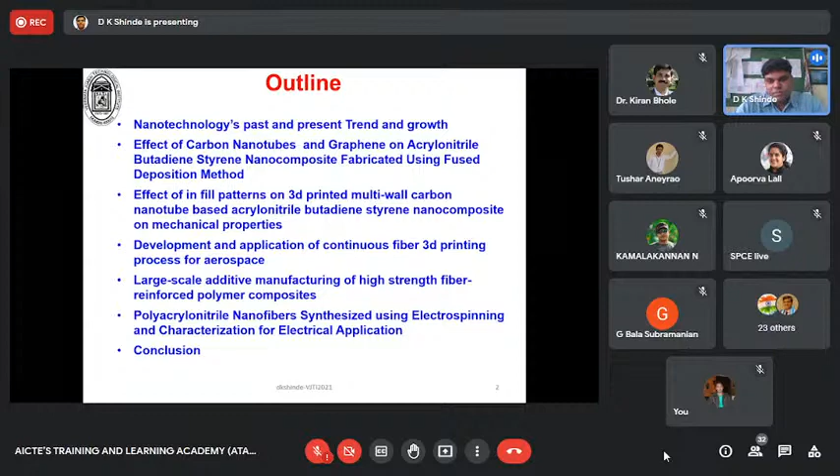And if I get more time, I can talk about electrospinning and a few of those applications we are developing, and how those fibers can be used to develop 3D printings. So I will emphasize on that part. This is what I have prepared for today, and I will go through that.

Everybody knows, I know all the participants are from different areas of the country, maybe from different states. So we are located in Mumbai, central part, close to Dadar. We, VJTI, were established in 1887. This is a very old institute in Mumbai, which also gave birth to many IITs. IIT Bombay was also established by VJTI faculties, and the director of IIT in the founding year was from VJTI. So this is a very old institute. Earlier it was called Victoria Jubilee Technological Institute. In 1999, it was converted to the name of the mother of Chhatrapati Shivaji Maharaj, Veer Mata Jijabai, and now the acronym remains the same, VJTI.

I did my PhD from North Carolina A&T State University, USA. This is the US map, and this is the eastern side. North Carolina is here, and we are located at the Greensboro campus of North Carolina. The school in which I did my PhD in nano engineering was the Joint School of Nanoscience and Nanoengineering at the Greensboro campus, shown over here.

VJTI has a few UG and PG programs. We stood at NIRF ranking of 82, and ARIIA ranking of fifth among Government Engineering Colleges in the 2020 ranking, and 82 in NIRF 2021, and many more activities going on from my institute side. I belong to the Department of Production Engineering, established in '59, and a few of the programs we run at our department are BTech, MTech, and PhD in the Department of Production Engineering, VJTI. That is from my side. I always give a small introduction of my department, my institute, what we are doing, and where we are coming from.

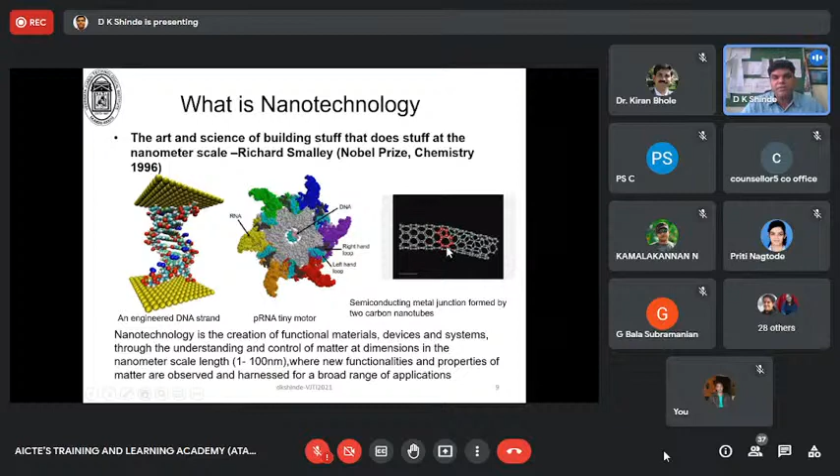A few examples: here is a molecular dynamics simulation in Material Studio. This is an engineered DNA strand, made by joining atoms to prepare a DNA strand with the help of molecular modeling at the nanoscale. Then you see the pRNA tiny motor, which has been created with DNA inside and RNA outside, with right-hand loops and left-hand loops, showing how you can prepare pRNA tiny motors with nano stuff at the nanoscale level. This one is a semiconducting metal junction formed by two carbon nanotubes connected together, modeling done at the initial level to see that.

So what is nano? Nano is nothing but 10 to the power minus 9, or one billionth of a meter. That much small size — we know micro sizes, micrometers, which we have seen under the microscope. But to do this work, we need some kind of scale specified for this technology. We take 1 to 100 nanometers, but we cannot see everything with the naked eye, so we need microscopic equipment called scanning electron microscope, transmission electron microscope, or atomic force microscopy — AFM, TEM, SEM — required to see and manipulate things at the atomic level.

And if you take that walk across a dollar bill, how long would it take to reach the other side? That's how you can think about these small scales. The person would take almost 24 years to walk across a 10 rupee note, or a $1 bill, when shrunk to 1 nanometer size. That's how the smaller the things, the more important scale plays a role.

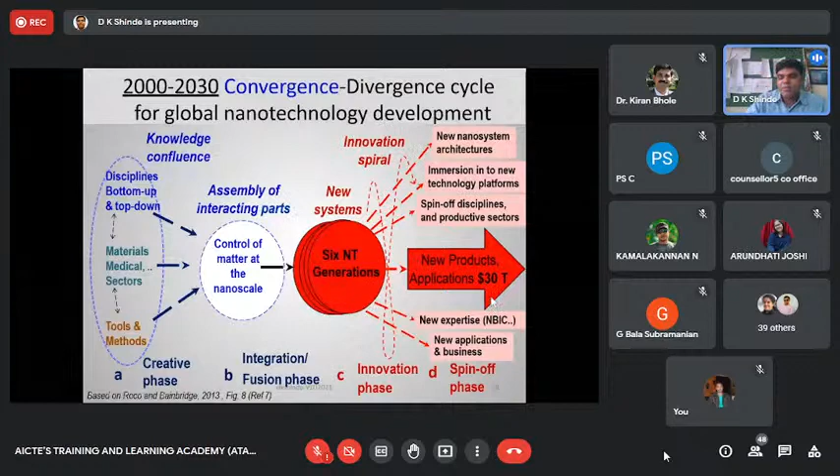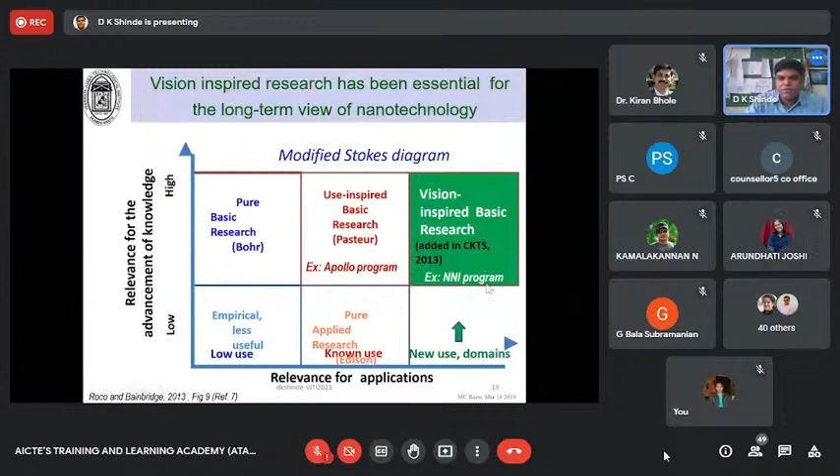So vision-inspired research is now changing from the conventional way to vision-inspired research by adding those nanotechnology initiatives. A few of those representations in the last 30-year development, if you look over here, it's changing the focus and priority to converging knowledge and technology for societal development.

Phenomena and devices are coming with nanophotonics, nano components, quantum fluctuation between selected materials, and material surfaces are becoming almost frictionless in magnetic computing. Also, million times less energy consumption is required.

How developed countries like the United States - a few of those presidents spend more budget on nanotechnology, from Clinton, Bush, Obama, Trump, and now the 2030s era. Biden is also giving a higher budget to nanotechnology innovation and initiatives to bring technology development and make the energy sustainable goal of the United Nations.

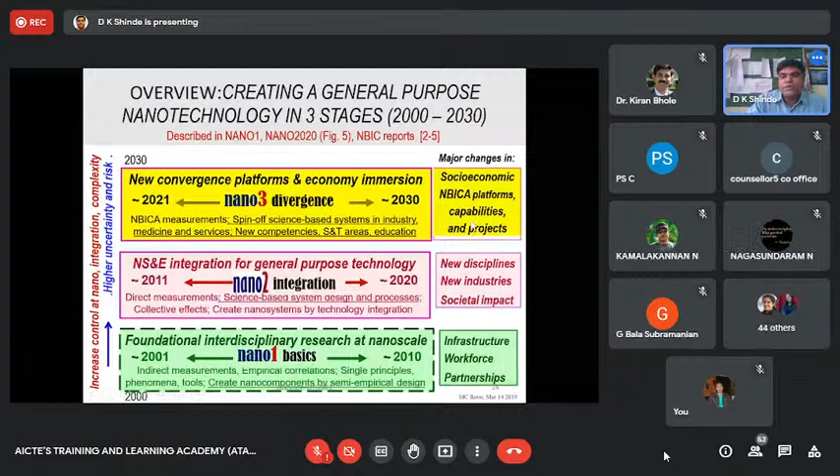Then nanosystems in health and environmental devices are coming. So these 2D and 3D many systems and devices have come in the form of biomimetics based, biorobotics, neuromorphic, or adiabatic switching for ITs and quantum systems.

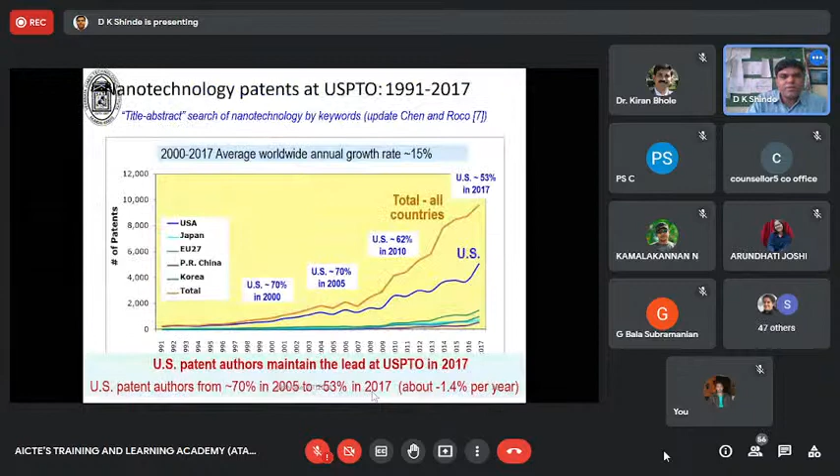A few of those countries are contributing to the research. So then, penetration of nanotechnologies, in terms of the percentage of patents -- basically many patents are coming, so you have a lot of scope to develop new material and file patents. That's what I want to encourage from this slide and a few slides which are coming.

So US, China, Europe, and Korea are majorly filing patents and getting more journals and patents, and that's how the material develops, and they are leading the technology world in the use of nanotechnology to make new systems and devices right now.

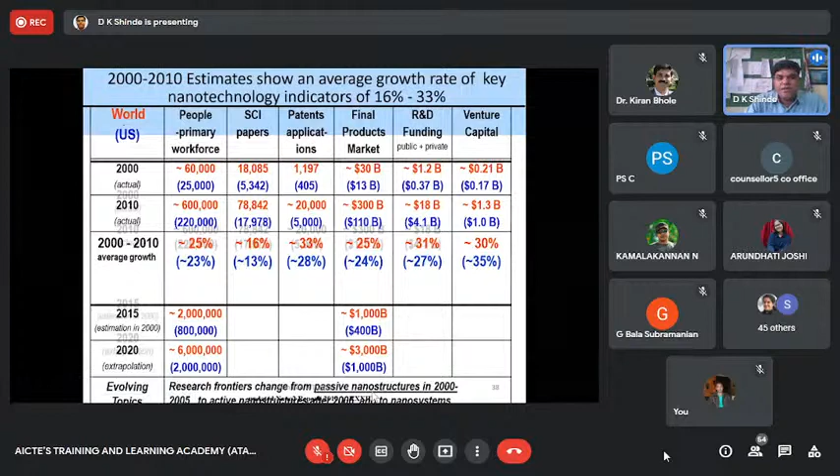So these slides show how patent applications are growing, and what's the product market has captured exponentially. The market growth is exponential and occurring.

So look at this one: in 2000 the market was only $30 billion. Now in 2020 it is $3 trillion, and it is still growing, and it can be bigger than that.

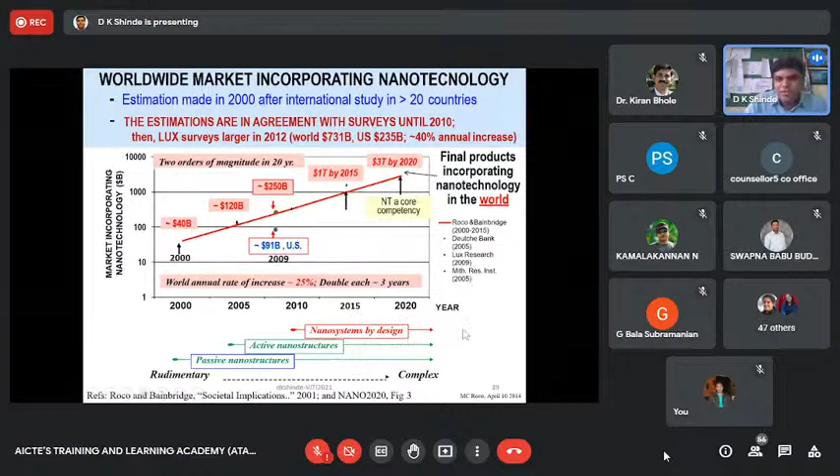So from passive nanostructures, active nanostructures, and the overlapping of those, nanosystems by design are coming, and people are investing a lot. So there is a lot of scope for new people who want to build their career in nanotechnology.

This is a little bit about what I have planned to help you understand more about nanotechnology and how it is going on. So let's start with the mechanical and electrical properties of carbon nanotube based material.

Acrylonitrile butadiene styrene, ABS material -- what we call a nanocomposite -- fabricated using fused deposition methods. This paper is already published in a Scopus publication of SAMPE in 2019. So we have a few things to share with you about the fused deposition modeling process.

You have understood from the presentations and talks from the past couple of days. The most recognized form of 3D printing of thermoplastic is commonly known as the extrusion method, and the same can be done with the help of fused deposition modeling, using extruders with a nozzle self-heated for the filament to melt, then deposit layer by layer and cure it, that is solidify, and deposit another layer.

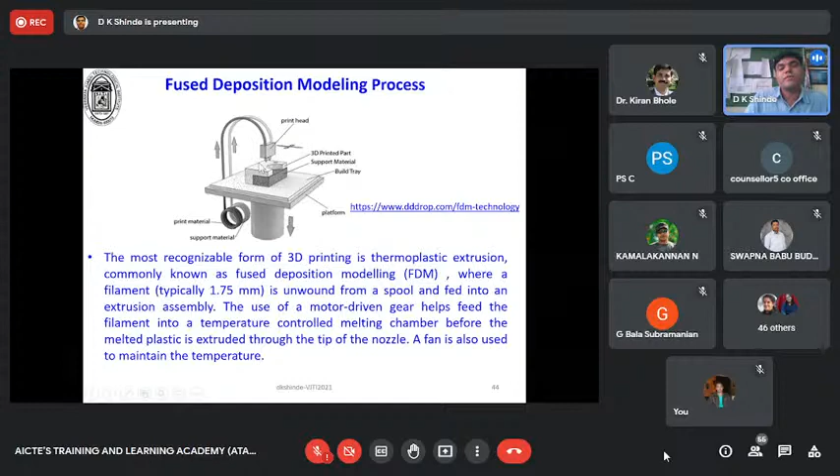So these are the spools which are unwound and pass through the nozzles, and you have the 3D printer head in which the heating arrangement is made, and there is a 1.75 millimeter hole in that nozzle through which the melted solution comes down, and you keep depositing.

Using the XY movement of your extruder is the best way to deposit. A few of these examples are captured from various internet sites and brought to one place to understand how things can be built using different materials. So first you develop the 3D model, then you do the slicing using the STL file, upload the STL file, set your material and check all parameters, and the entire 3D printing is completed by layer by layer deposition using fused deposition modeling.

So you have a lot of scope in the construction area. Automobile and aerospace people are working on reducing many components into fewer components in the assembly, so as to increase the reliability and efficiency of highly critical components in the aircraft. For example, take aircraft engines, generally GE may manufacture most of Boeing's aircraft engines, and they have converted nearly 1,000 components into like 200-300 component assemblies of the engine, joining sub-assemblies, so fewer parts means lower chances of component failure and higher efficiency. That's how 3D printing helps develop such components.

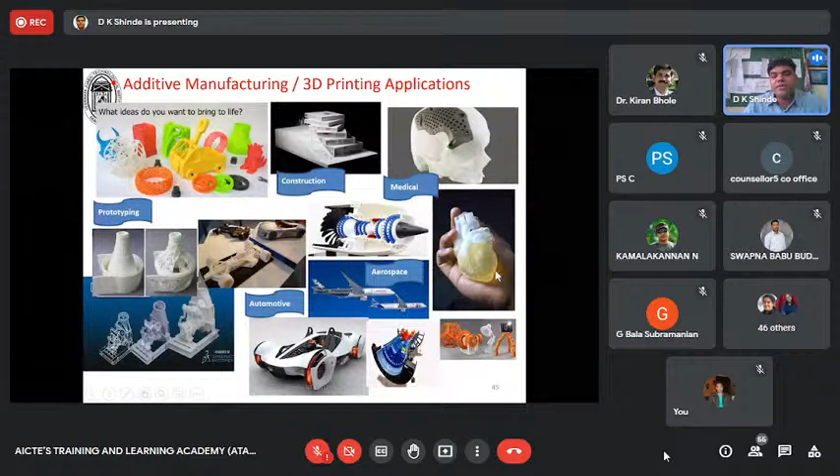So this is what we see, a few of these, our heart has been printed using this kind of polymer material, as shown over here. There are many others as well. So this is how it looks like.

So if you see over here, first you generate the CAD model. This is a frame with the XYZ coordinate system, G code and M code you give, and generate the code, and that code is fed to the processor, which controls the movement of the extruder in X, Y and Z direction over the substrate. So first and foremost is the CAD model, which you slice to get the STL file, and that STL file is fed to the computer, which deposits layer by layer, and finally we get the typical model we created in the CAD model.

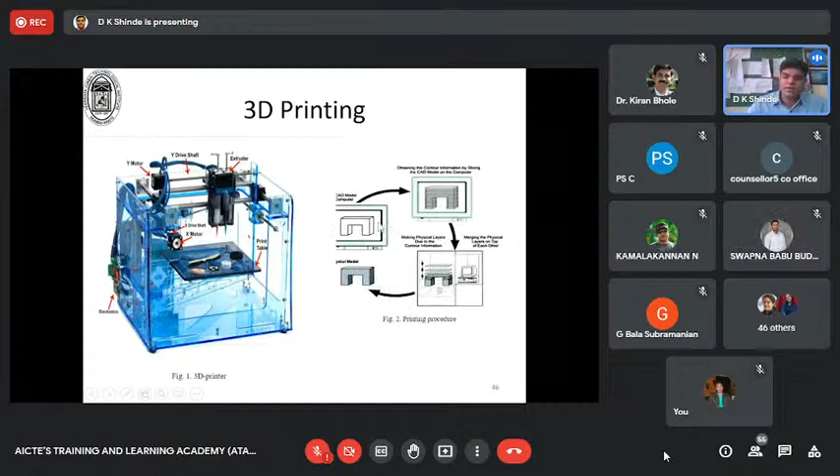So how does it exactly get deposited? You can see in this 3D pictorial view. This is a bottom platform which can move up and down, with layer by layer depositions shown clearly as layer 1, 2, 3, 4 like that. This is the shape, and this is how it comes, and once deposited, either to quickly cure we need to use a laser or maybe some UV light to cure it, and you can deposit another layer, and that's how you save time and material wastage very easily.

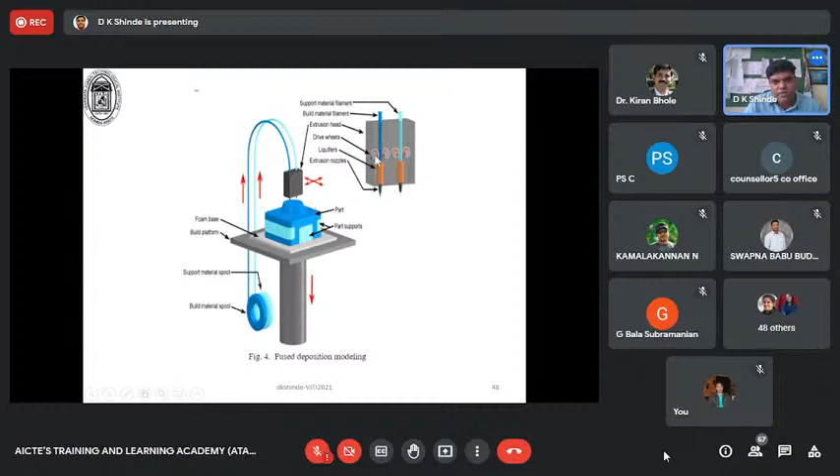The challenges are in self-cleaning, the clogging of nozzles is a main challenge, and people are now addressing this a lot, developing self-cleaning mechanisms that at a certain interval clean themselves and again start redepositing. So this is how the parts are built, but we still need to take care of continuous maintenance of the rollers, the heating zone, the coils of the extrusion, and nozzle cleaning.

So they have some mechanism attached with this one. They self clean, then feed it, and start depositing after a certain interval of time, and that's how a lot of time has been saved in the 3D printing.

So, a few of those laminate manufacturing methods. How to make laminate 3D printing laminates.

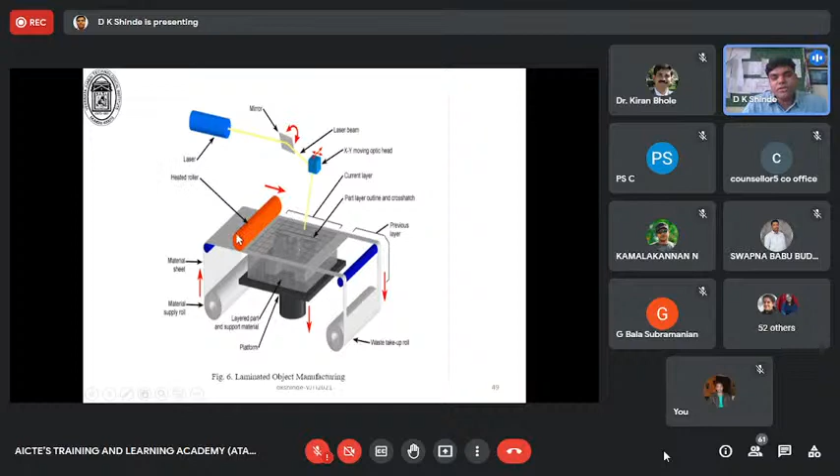So like that, you can have laminated object manufacturing also by using the 3D printing method. The material comes from here and the waste take-up roll will be on this particular side, and your part will be built. This is how we initially give the heat, but curing will be majorly done by this one.

So in our 3D printing manufacturing, we use the AccuSoft 3D printing system. This is a dual extruder 3D printer which we have in our laboratory to manufacture the ABS mixed with carbon nanotube, that's what I'm going to demonstrate.

Certain weight percentage of adding multi-walled carbon nanotubes has been shown from the literature to improve the properties of the material. But how do we customize such kind of spool is the major part of this research. So what we did, we customized it by adding a certain varying weight percentage of the multi-walled carbon nanotube to characterize the material and see what mechanical and electrical properties have been improved. That was the major goal.

So why did we choose ABS? ABS is widely used in automobile body parts, dashboards, wheel covers, and many other applications requiring cheap material, and easily you can develop such kind of material. The styrene acrylonitrile in the presence of polybutadiene, and that gives the shiny surface, and also has a rubbery substance and provides resilience at lower temperatures, and therefore this material has been widely used.

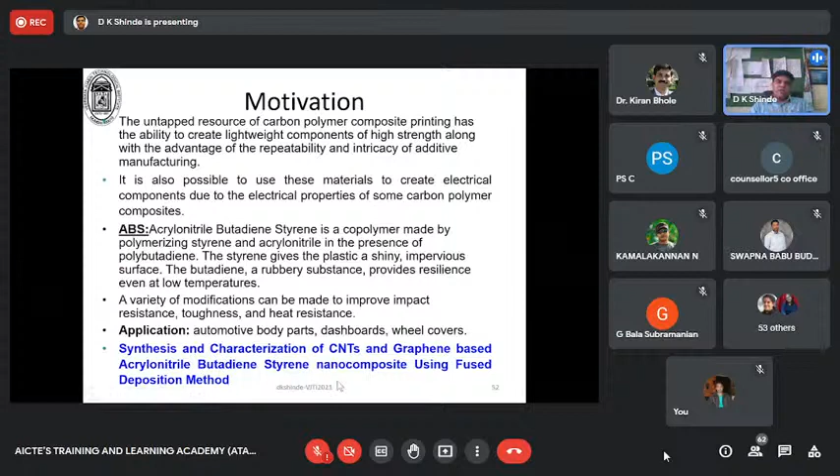But our goal is to improve the mechanical and electrical properties of the existing natural ABS material, and that's how the goal was to develop both the synthesis and characterization of CNT and graphene based acrylonitrile butadiene styrene nanocomposite using this one.

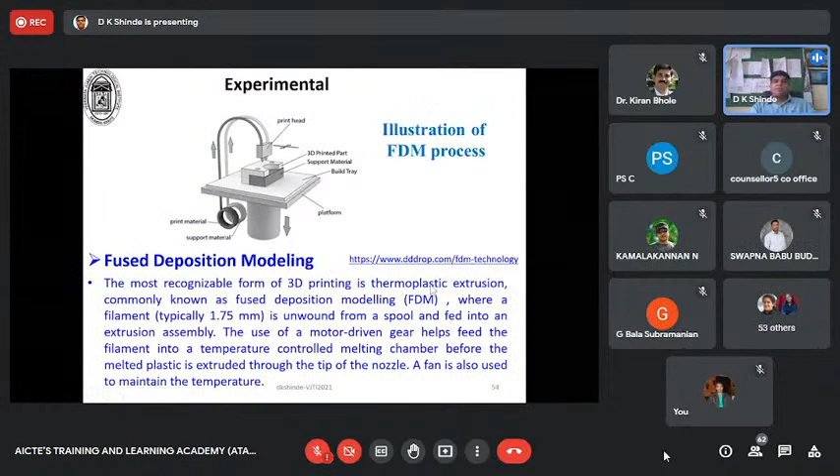So this is what people are using: carbon blacks or graphene oxide and other oxides, for many applications to develop new material. But in our research, we decided to use 3D printing of those materials using carbon nanotubes.

So we took three major weight percentages of multiwall carbon nanotubes. We bought it from suppliers from Faridabad as well as Jharkhand, and we did the characterization despite the characterization sheet given by the manufacturer synthesizing agencies from the source. Then we selected three weight percentages: 0.1, 0.2, and 0.3, to add into the natural ABS.

And prepare our spool. Customized spool was the first stage. So how did we do that? We have the pellets of ABS, and then we added three weight percentages: 0.1, 0.2, as shown over here, and 0.3 weight percentage of the total weight of the spool. Let's say the spool may be having like 2 kg, so we added that weight percentage, 0.1, 0.2, 0.3, and we prepared it.

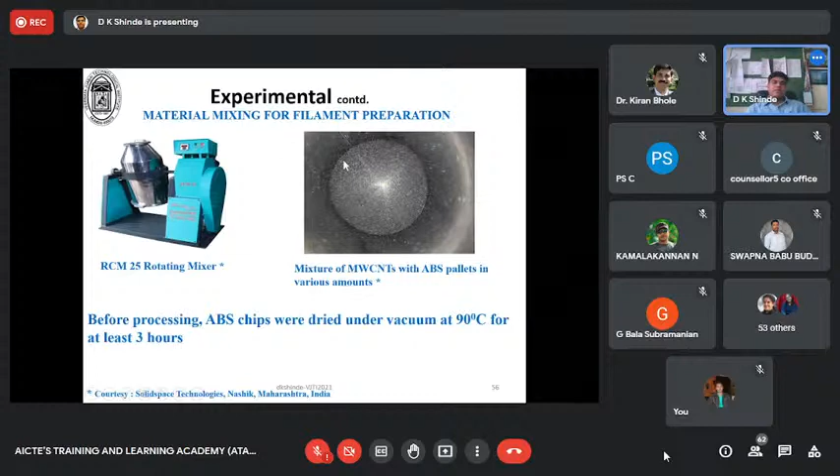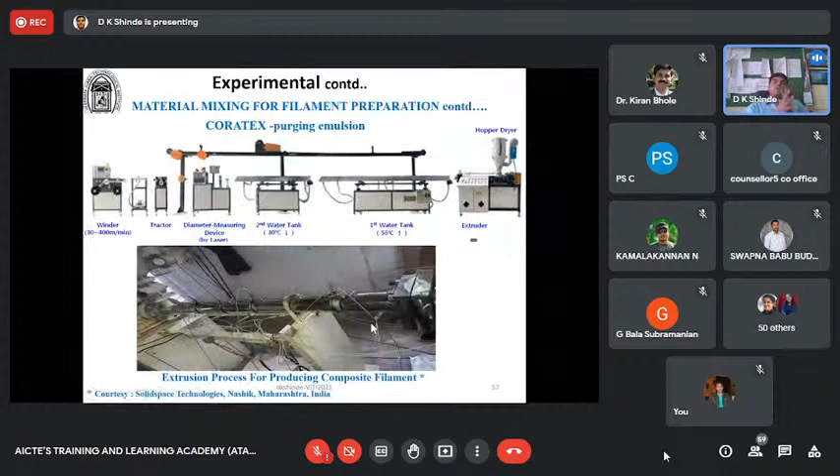Once that spool is made with 0.1, 0.2, and 0.3 weight percentage, then it will be taken to print the 3D printing parts. So directly what we did, we wanted to do the material characterization.

We followed ASTM D638 standards to print the specimen size directly rather than preparing a sheet and cutting it. So we directly 3D printed the dog bone shape coupons of natural ABS, 0.1 weight percent, 0.2, and 0.3 weight percentage of those spools.

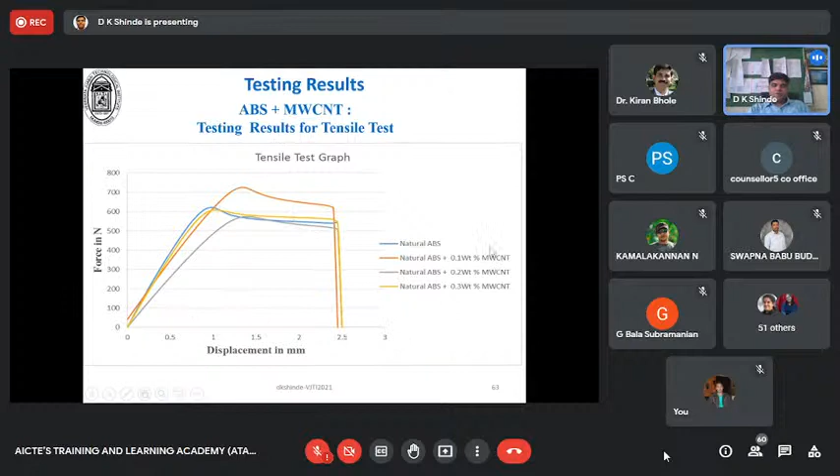Then we pulled those samples, and the tensile results are shown here. The natural ABS is blue, whereas 0.1 has shown the highest energy to fail the material, shown in orange. Up to 0.1 it has shown improvement in tensile strength, whereas adding 0.2 and 0.3 causes a drop in tensile strength of the specimen, which plays an important role in understanding that adding more doesn't support improvement in tensile strength.

If you compare this tensile strength, 21% has increased, and from the graph, roughly 12% has increased with 0.2 and 0.3. It starts decreasing very slightly after that.

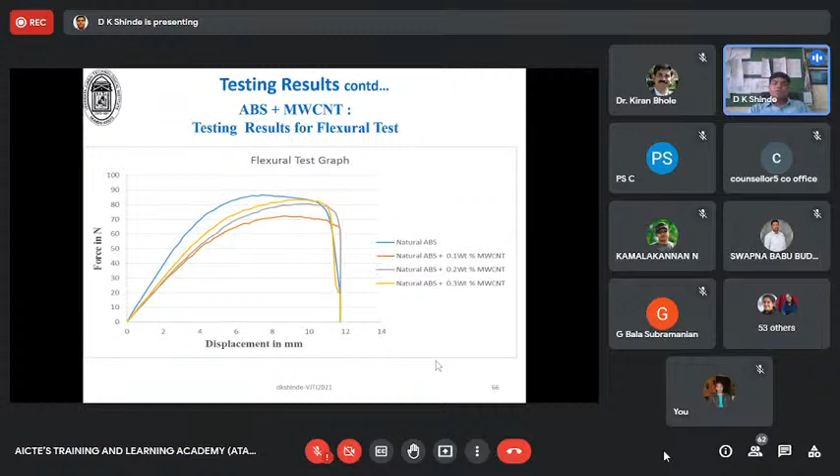Then we wanted to see what improvement in electrical conductivity occurred using the 3-probe electric conductivity test method, which we used from the VJTI electrical department, as well as similar testing done at the VNIT facility.

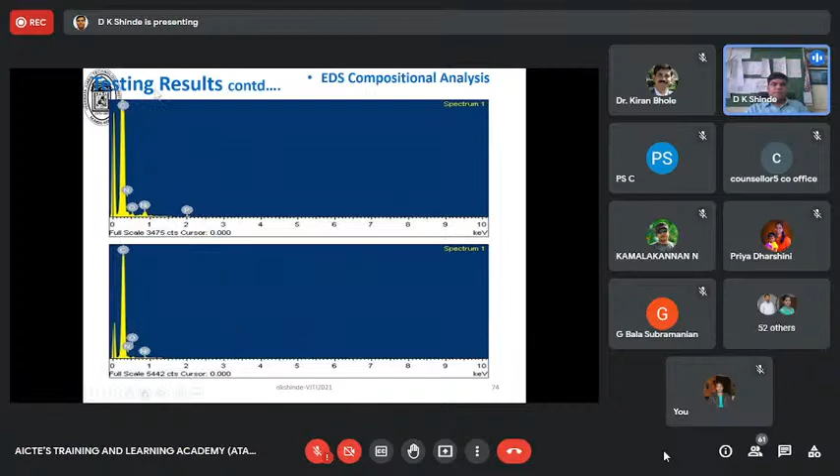Carbon has the highest percentage, then nitrogen, oxygen, nickel, and phosphorus, which are shown in some of those images. But carbon has shown the highest percentage, and we also did statistical analysis to see the atom percentage or weight percentage of carbon.

Carbon, nitrogen, oxygen, phosphorus, and nickel are the major elements detected in the EDS analysis. And continuously we see 73, 77, 79, 79—those are the percentage increases seen in carbon, and that gives the improvement in the electrical conductivity of the ABS with CNT.

So the result we have seen from this is around 22% improvement with adding 0.1 MWCNT in the ABS, as an outcome.

Flexural strength dropped maximum to 15%, so it's not advisable to use more in flexural applications. Electrical conductivity has shown improvement; continuous improvement is possible, but you have to tailor the weight percentage and decide which property you want, electrical or mechanical.

This can be one way of improving the properties, but you cannot judge that increasing electrical conductivity will also increase mechanical properties, because of some of those defects. And 3D printing angles also play an important role in improving those properties. There is a lot of scope to develop this 3D printing material.

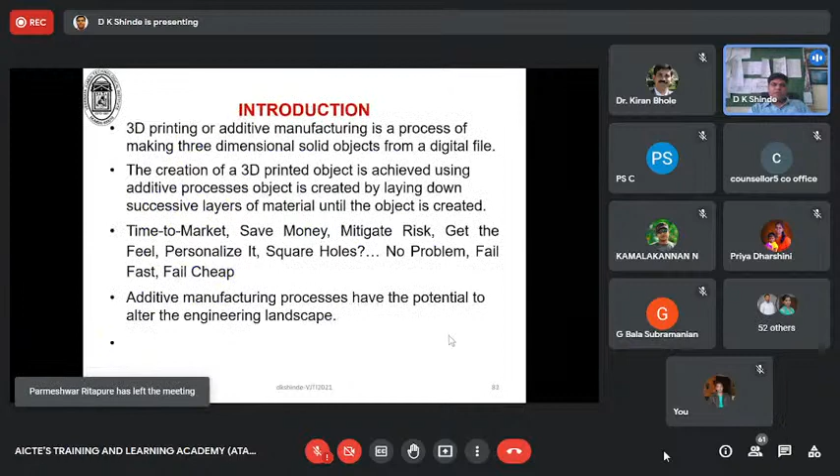Similarly, for graphene also we followed the same methods. In the manufacturing of those spools, we conducted similar tests.

Graphene is an incredibly strong material with tensile property greater than 130 gigapascal, which is more like around 250 times greater than steel.

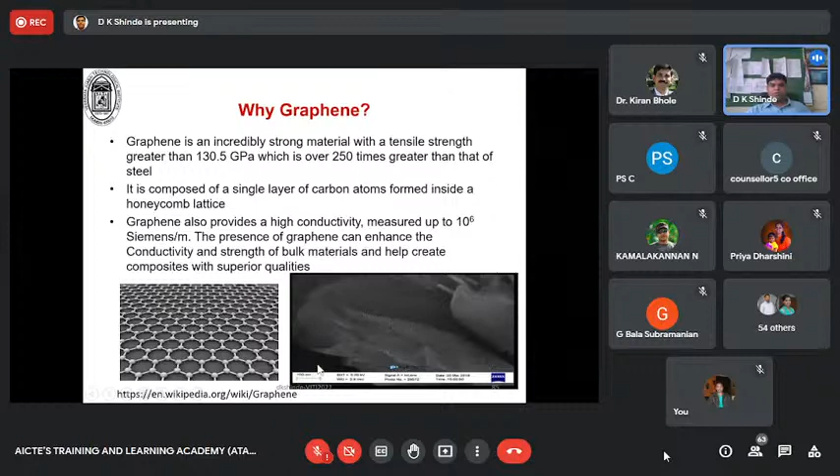This is how the graphene sheet at 100 nanometer has been seen. TEM can show the actual image, such an image, but we could not do it. SEM has shown this is the graphene sheet, as it was when we bought it from the vendor.

Then in the same way we followed the method of adding the ABS with nano graphene powders, which was added with the same—this is from Nashik, one of our vendors. So we mix this graphene again with the pellets, and then we followed this mixture to maintain the spool diameter.

We maintained 1.75 millimeter diameter, and finally the filament is automatically wound around a spool.

This is the same setup. We just changed it by replacing the ABS with graphene in this setup, and then it passed through this particular stage of the extruder, and finally we wound it and made this spool.

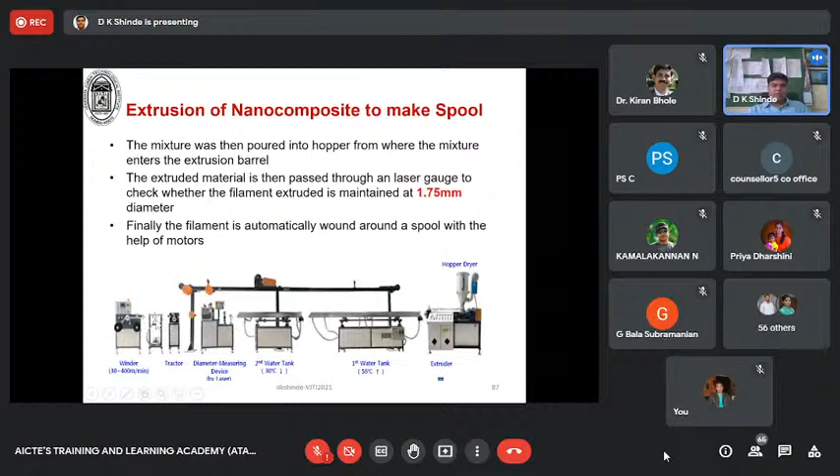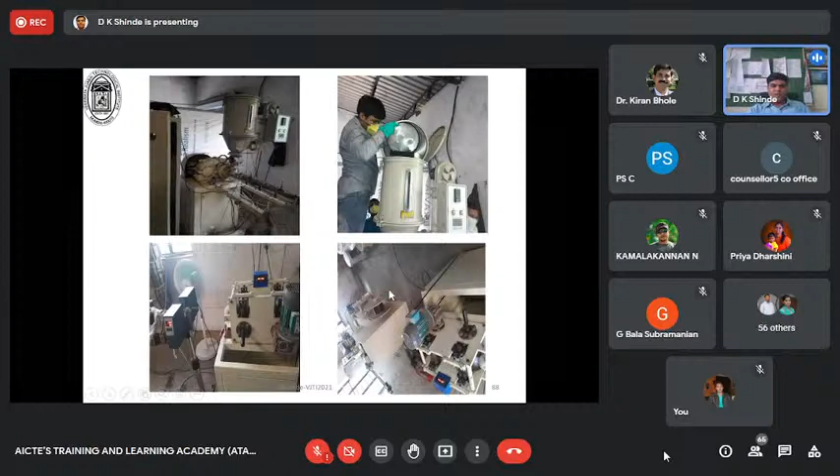My student who worked on this one, Bora, prepared his own material. He is pouring it into the hopper. You can see this is the extruder where he is pouring, and then it passes through to the winder where you wind it up. This is how the spool was prepared on this setup to make our customized material at the Nasik facility.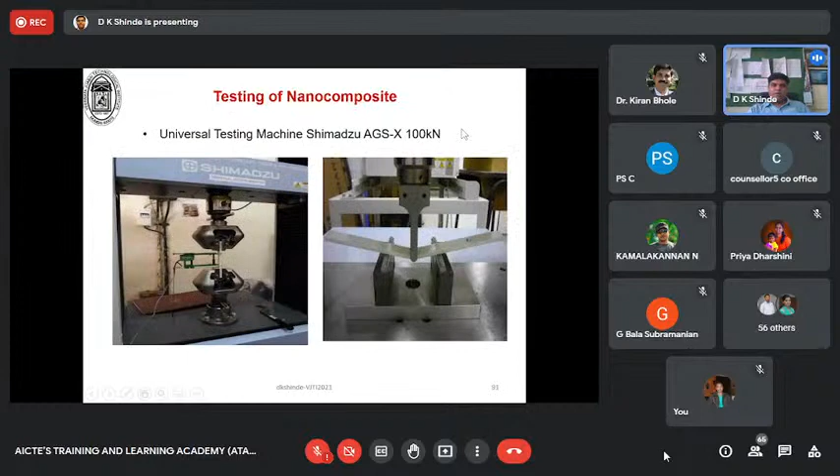He then 3D printed material using this particular filament, and did both tensile and flexural testing for the graphene to see what properties could be improved.

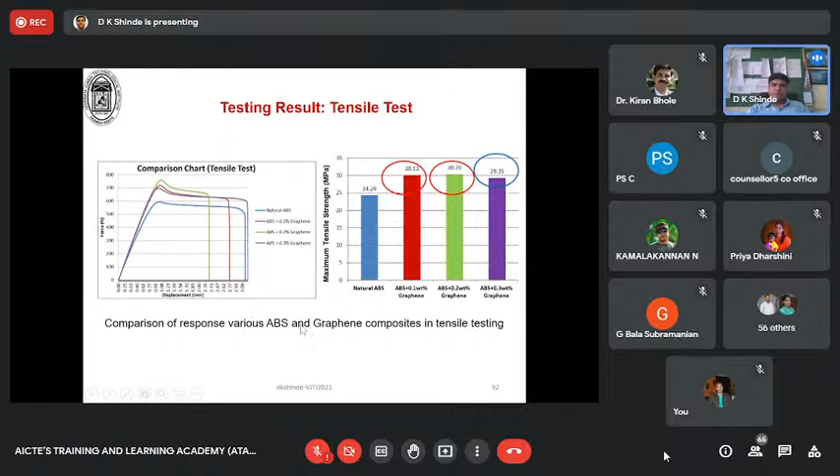If you look here, this is the tensile strength. For the ABS with 0.1%, 0.2%, and 0.3% graphene, it has continuously shown the highest strength, followed by the graphene ABS nanocomposite printed by 3D printing. You can see values around 24, 30, 30.3 and 29 MPa. It has shown continuous improvement over natural ABS by adding the graphene.

Even in flexural testing, we observed a decline in flexural properties compared with the previous CNT ABS nanocomposite. The natural material shows the highest flexural strength, but as you keep adding 0.1, 0.2 and 0.3% graphene, the flexural strength starts declining.

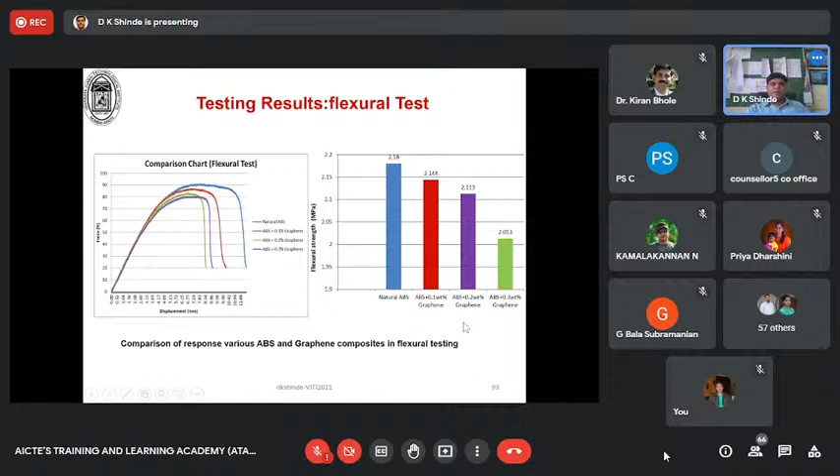We also did SEM imaging for the same sample with graphene and natural ABS, which has shown a brittle, rough surface, meaning good bonding has been achieved. Fewer pockets are seen compared with the MWCNT sample, and it has improved the mechanical properties continuously compared with CNT ABS.

So at 0.3%, we see a 24% tensile strength increase but a decrease in flexural strength. There's also an effect of the deposition angle. We always deposit at plus 45 plus 45 degrees. If we had done plus and minus, it might have improved other properties better than the 24% outcome we achieved in this research.

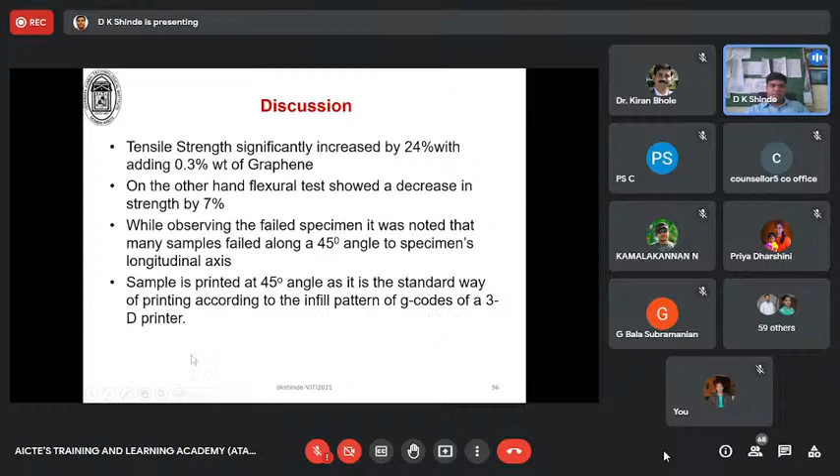This research was also published in Nanocon 2018 at Pune. So the G-code and 3D printing process has scope to improve. This was the direction of deposition we used, but you can change the direction, or make one layer plus 45 and one layer minus 45. If you do this, there is a possibility to increase the 3D printed mechanical properties.

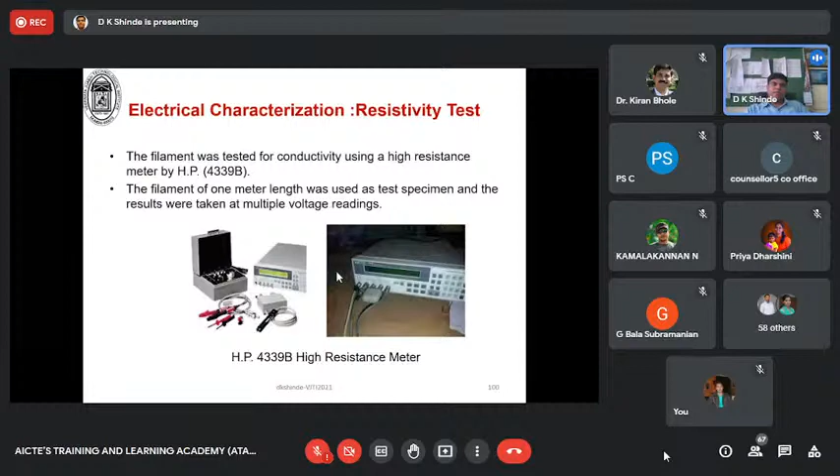We also conducted resistivity tests for these separately fabricated materials. This is the comparison that resulted, showing improvement in electrical properties with a drop and increase in resistivity.

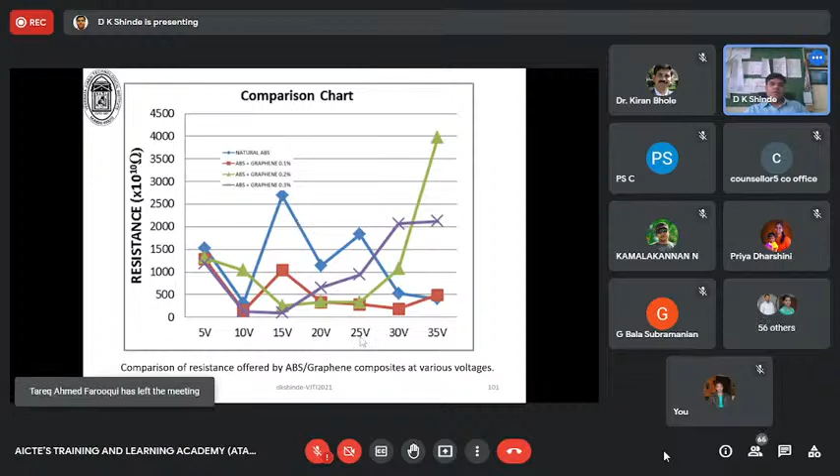That means at a certain voltage, we see very low resistivity values for the 0.1% and 0.2% samples between 20 to 25 volts, giving the highest electrical conductivity. The conductivity test was done at a particular voltage, but increasing voltage also plays an important role. At a low voltage of 15 volt DC, the 0.3% sample showed the highest conductivity, around 2750 Siemens per meter, which is the highest thermal electrical conductivity compared to natural ABS at zero percent.

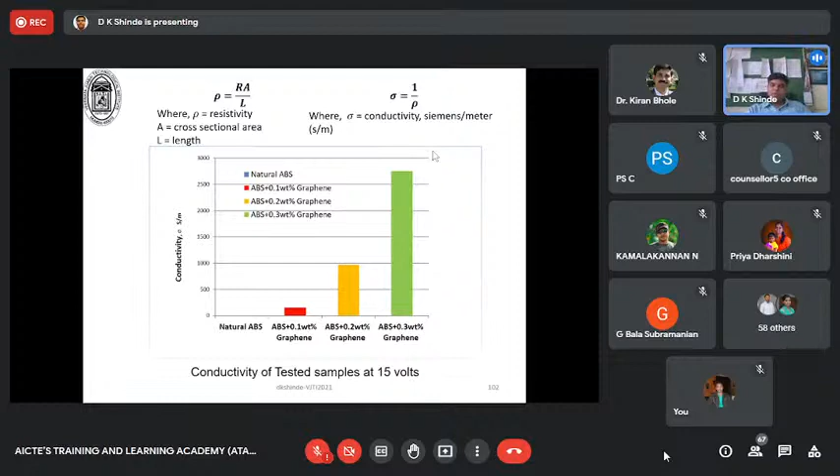So it has exponentially increased the electrical conductivity of the graphene ABS nanocomposite printed using 3D printing methods. There are some imperfections seen at different voltages, and maybe the FDM process has some pockets or voids that act as insulators, causing variation in the conductivity, and those voids also play an important role.

So from this entire EDS analysis, tensile testing, and electrical conductivity study, overall we achieved a 24% improvement with 0.3% graphene in ABS, though with a decrease in flexural strength.

Electrical conductivity is attributed to those imperfections, but it is still improving your electrical conductivity. If you reduce those bubbles and air pockets, this property will again improve a lot. That's the clear indication the graphene result has given. So an increase in conductivity opens up opportunities in electrical circuit board applications where some kind of conductivity property is important.

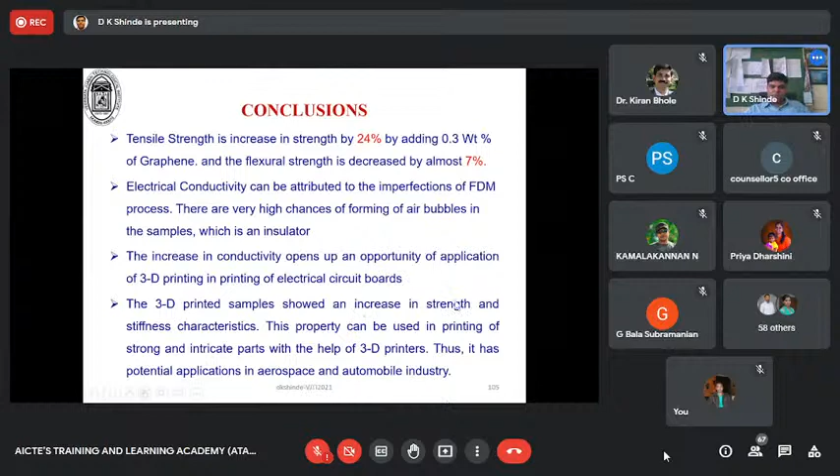So in 3D printing, strength and stiffness can also be possible. We did 3D printing of natural ABS with graphene and CNT. We also have separate research by a PhD student whose thesis is submitted, where he worked on infill patterns and percentage infill. So we chose multi-walled carbon nanotubes and ABS again as material to fabricate using the FDM process.

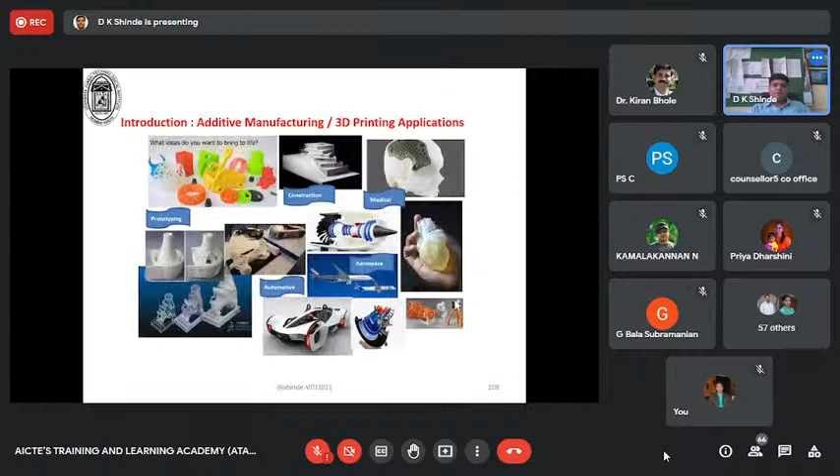This is also from a SAMPE published paper, 2021. Building on our previous ABS with multi-walled carbon nanotube work which gave a clear idea about improving mechanical properties, we chose to see, by changing the infill patterns and percentage infill, whether the electrical and mechanical properties have any kind of influence on the ABS with MWCNT.

So we again went back to our vendor to prepare our own spool, and then added the weight percentages followed in the previous research, like 0.1 and 0.2 percent. Then selecting the infill patterns and percentage infill was the key objective of this research, and we printed those using the dual extruder 3D printer available in our laboratory. Testing and analysis were done, and the properties we obtained were compared with those previously obtained.

The motivation came from the first research where we saw a 15.3% and 25% tensile strength increase, along with a drop percentage we observed - a flexural drop and a tensile improvement. These two properties, an increase and a decline, motivated us to go with infill pattern variation.

What's important here is to see variation in infill patterns such as full honeycomb, grid, rectilinear, and triangular. We selected these four infill patterns which have shown geometrically higher strength in the regular kind of material being used. The same grid infill patterns were chosen for this particular analysis. Infill material percentage is also very important to reduce weight as well as material usage, so we took 100%, 50%, and 20% for this investigation.

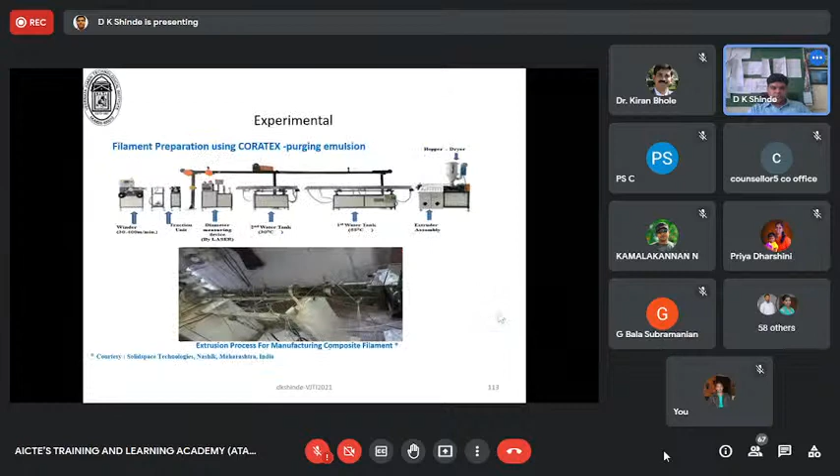This is how we prepared our spool - these images represent and indicate natural pellets. If you melt it, it looks watery, but the pellets are mixed, so you have mixing with pellets. The weight percentage is accurately measured, mixed, and then passed through the mixer, then heated, and before pouring, extrusion steps are done - this was Solid Space's agency work for us. So 3D printed customized spools - all three variations, 0.1, 0.2, and natural ABS white - were printed.

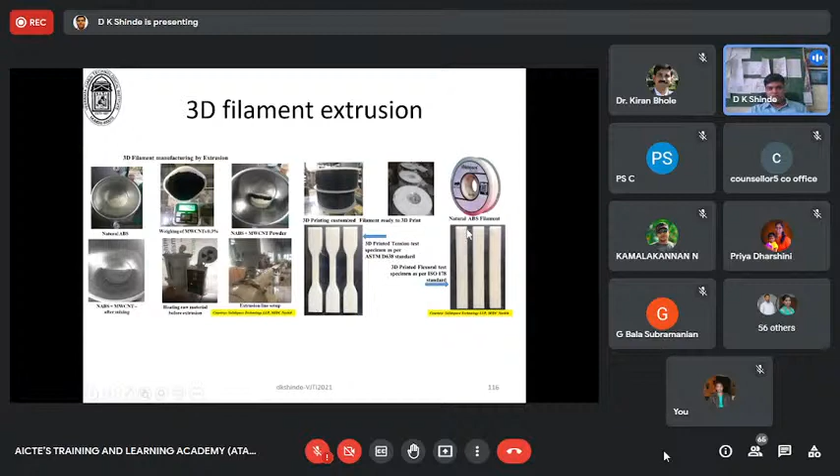So this is what we actually printed, the natural ABS 3D printed material as per ASTM D638, in rectangular shape using our 3D printing facility. The very interesting part of this research is to go with various types of infill patterns for the 3D printing material samples.

So this is honeycomb, but we wanted to print the material with the specimen size in a dog bone shape, as seen in the previous research. So we directly created the model of dog bone shape by incorporating the honeycomb structure inside it, layer by layer, and such specimens were built using the 3D printing facility by providing the STL file to the printer.

Similarly, we also printed rectilinear patterns in the dog bone shape. You can see the rectilinear pattern created here. Then triangular patterns, shown in the first, second, and third layers, to maintain the minimum thickness required by ASTM. And then we did the grid pattern. So all four different infill patterns were modeled using CAD software, and those models were taken for 3D printing.

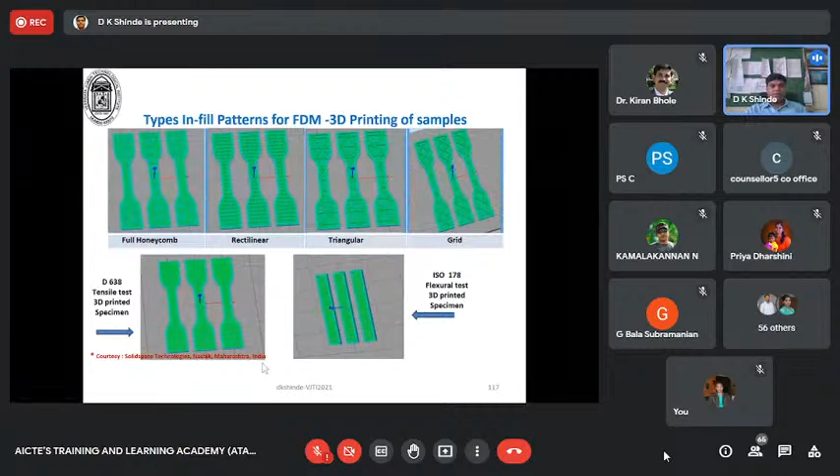Here you can see a specimen with 100% fill, in the dog bone shape, used for tensile testing specimens. This is natural ABS with 100% fill, without any modification. This is 45-degree infill, where deposition of those layers was done, and then it was taken for printing.

If you look at the volume percentage, 20% volume infill is shown with the same kind of pattern. Then rectilinear with grid patterns, 50%, and then 100%, where the bottom and top layers use 100% with the same grid. So the 3D printed models clearly show the changing percentage of infill material in the grid patterns.

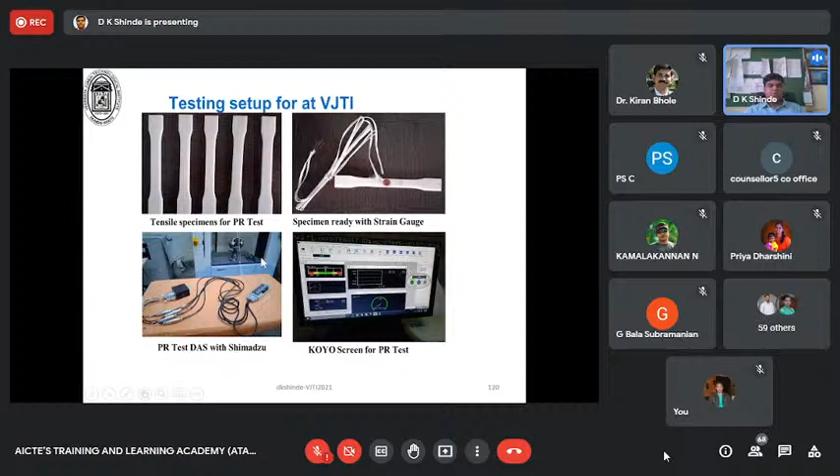So this is natural ABS with 100% fill, rectilinear pattern, prepared like this. Using strain gauges, we used the KOYO data acquisition system. Through the channels we connected and linked the data acquisition system to the Shimadzu UTM machine, and we captured properties for tensile testing of the 3D printed material.

Looking at the maximum values for the grid pattern, we tested 50% and 20% fill, as well as full honeycomb. At 50% it was 26 megapascal, at 20% almost the same. For rectilinear, 30% and for 50% and 20% it was 28 megapascal.

From this analysis and comparison of tensile properties across 0.1, 0.2, and 0.3 weight percentages across all four infill percentages of material while printing this 3D composite of tensile coupons, which we later tested, rectilinear showed the highest improvement at 0.1 weight percentage with 36 megapascal, whereas other patterns showed a continuous drop in mechanical tensile strength. Triangular showed the second-best performance compared to rectilinear at 0.1%.

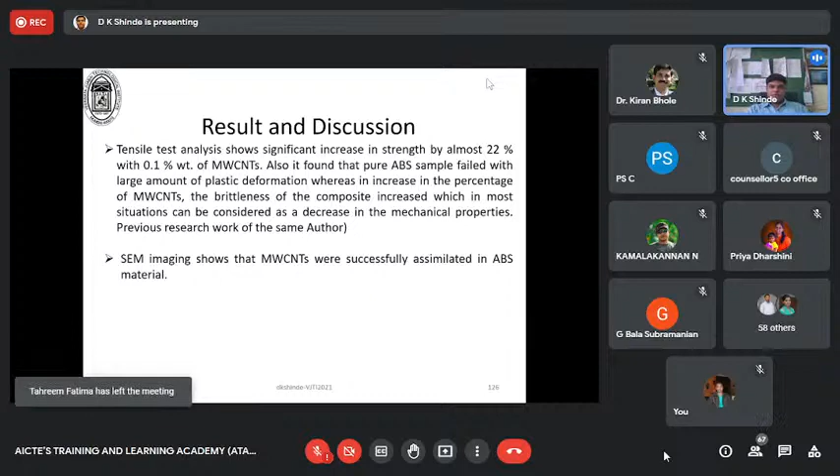So for percentage infill, finally you can see 36 megapascal, rectilinear 30 megapascal, and 20% has shown 28 megapascal. These are the key improvements which you can choose for further development.

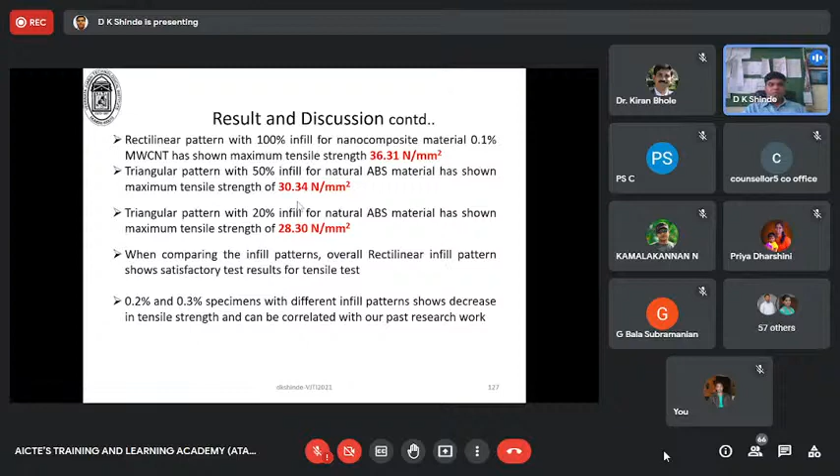Whereas 0.2 and 0.3 with different infill patterns always show a decrease in mechanical strength, and can be improved later. But currently you can go with these three outcomes: rectilinear, triangular, and triangular with 20%. So triangular with 50% and 20%, and rectilinear with 100%, have shown better improvement in mechanical strength from this particular analysis.

So we can work on improving those properties further. Factorial analysis is also there, but I'm not sharing it here as it's currently under review. Next, we can look at other examples of what other people are doing for continuous 3D printing in aerospace applications.

This is from SAMPE 2021, Boone, Lockheed Martin Aeronautical Division. So far what we have seen is improvement in 3D printed material properties, which is what we targeted to improve. Now let's see what we can do in 3D printing development.

Give me one second, let me have some water.

Okay, so this is what the material development has been done. Now, how do you develop the 3D printing facility for large future facility?

Most mechanical properties of the composite, what we see through thickness or interlaminar shear strength, are very weak in laminated composites also. So attempts have been made by various researchers to improve those using either the z-pinning method, improving damage tolerance, or 3D weaving. In my PhD research also, we improved this by interleaving glass nanofibers between the laminates, which improved interlaminar strength by almost 18 to 20%. So people are already working on this, and continuously working on it.

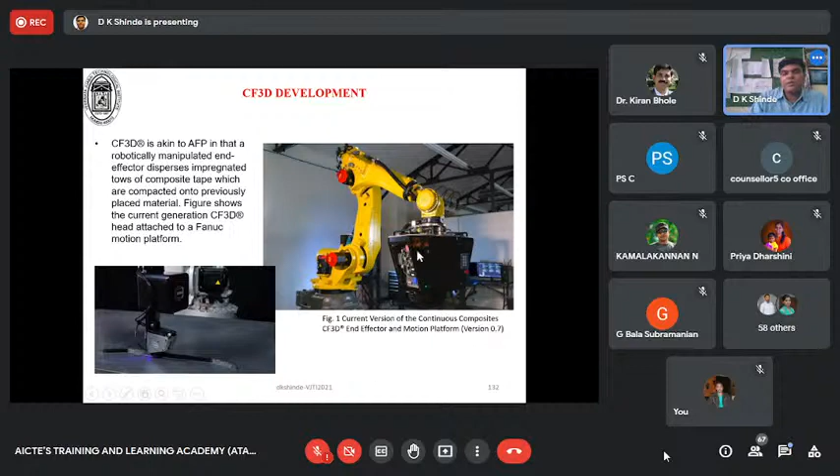So this is currently what people are using in the industry to build big continuous 3D printers. What is required for this kind of 3D printing is several versions of end effector motion strategies between them, and then you use this with photopolymer chemistry, which is required.

So what we need to work with for this 3D printing is you can use any off-the-shelf fibers whatever is available in the market right now - carbon fiber pre-preg, glass fiber pre-preg, ceramic fiber pre-preg, or aramid fibers, Kevlar fibers, Spectra, then Zylon and Dyneema. These fibers are available and can be used in the form of wire fiber; optical fibers can also be used to print. So this material is now used in industry to print and develop such structures using the available material, and you choose the resin and cure it.

Okay, so a few of the software required to do this analysis are traditional FEM or topology optimization software, required to have such package facility and infrastructure to analyze and see the physical and geometric as well as material characteristics, to create and validate the motion and get that result.

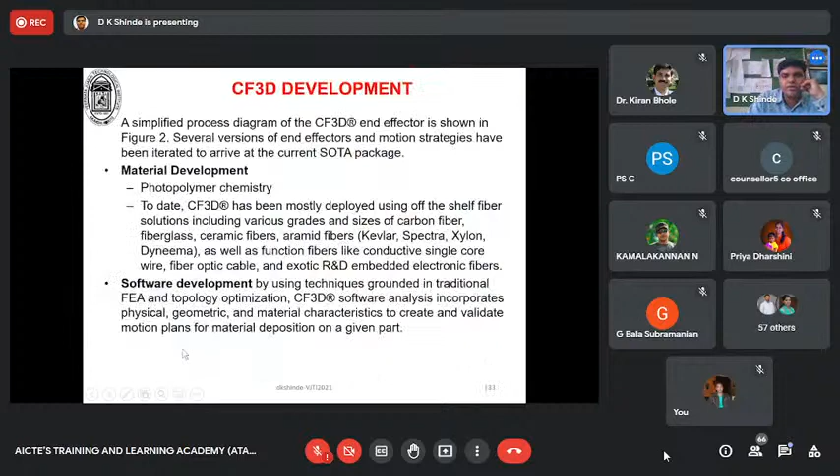This particular dry fiber ply will be passing through the resin bath. It will be impregnated with the resin. Excess resin will be taken out due to passing through the roller, and it will be depositing on the next roller. So this works as an extruder, depositing, and the roller will be moving like this.

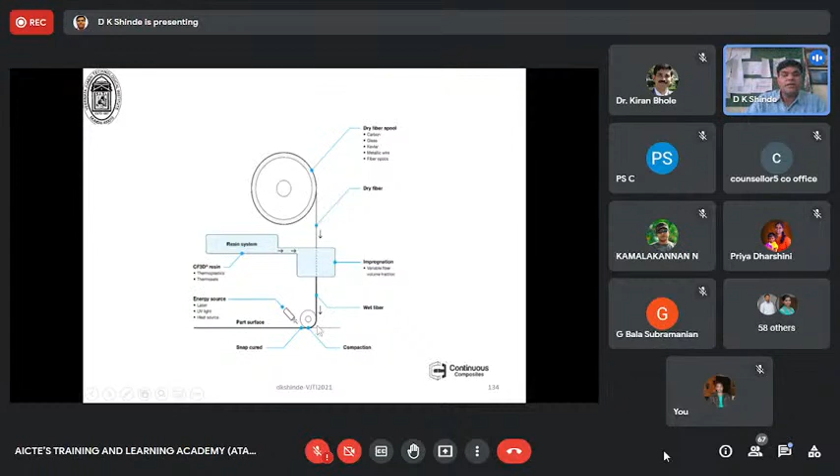This system will be outside, but mounted on a robotic arm, and it will develop such a 3D printing facility, a 3D printed mega part component, having a width of, say, 500 millimeters. It will develop a thickness of, say, 10 millimeters. The number of layers will be analyzed initially and passed through, and parallel curing action can be done very easily.

It has wide examples in aerospace applications and has challenges too, but people are right now using this facility and creating state of the art manufacturing. Despite curing challenges, people are still working on automation features. If you feed plies of fibers through the resin bath, you can deposit material at low cost raw material and high rate of material deposition, avoiding those issues.

Currently, the US Air Force has established a vision for a low cost attritable aircraft program, which will be developed for the single purpose of an unmanned platform, used in missions for the moon as well as Mars, to send small aircraft, or develop small aircraft over there, which may fly and do surveillance or other operations on the planets.

That is what they are right now looking at. They want to build over there, not on Earth. So take the material, go over there, and use the continuous fiber 3D printing method to develop those parts. They plan to build such an aircraft, built with a short time frame, low cost, and enable mass production in the future.

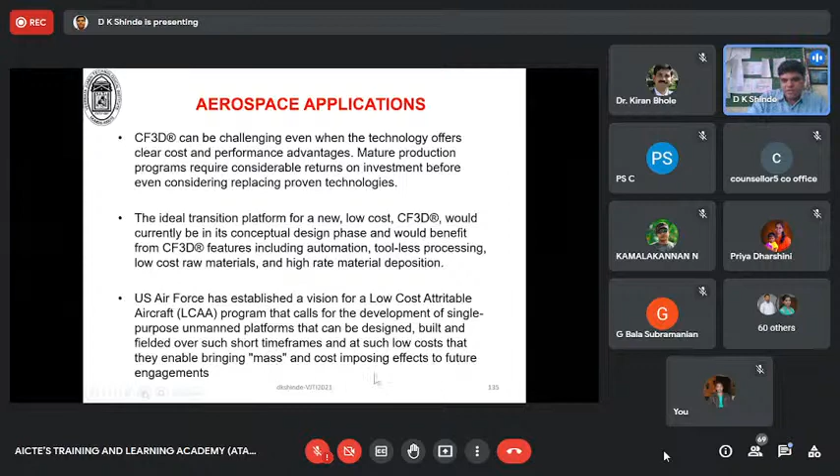Then this is how we can go for the digital factory. People are looking at Industry 4.0 or internet of things to make their digital factory for the future. Autonomy is the main goal of Industry 4.0. With robots and material supply systems and control systems using internet of things, you can manufacture with less assembly, enabling such manufacturing processes in coming days for mega structures with high accuracy and fewer components.

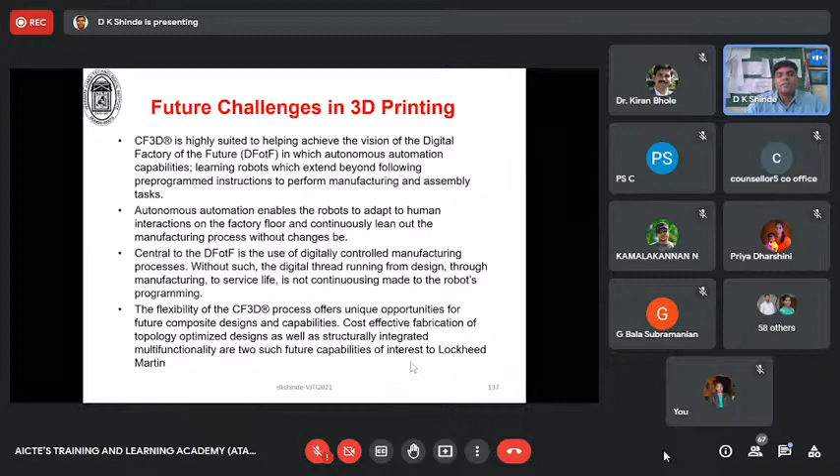With this digital thread running from design through manufacturing to service life, it is not yet continuously made by the robotic program, but it will be coming very soon. People will be having the entire structure built by this kind of manufacturing setup using automation very soon.

So the future of topology optimization is very important. You can reduce mass and increase mechanical properties by having such kind of topology optimization. Functionality and multifunctionality - smart material can also be put on the structure so that it can work as sensors and give signals to the ground base, with no need to install another sensor.

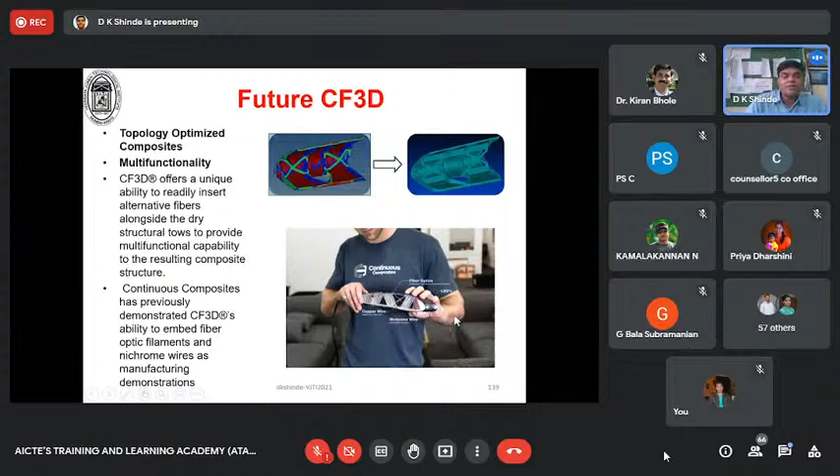So these are the metal components. Fiber optics has been kept here, and LED has been built during the manufacturing itself. These are the copper wires, also passed through while 3D printing. Then nickel and nichrome wires also pass through this particular printing of this kind of wing. So this is, you can say, the aerofoil having such kind of 3D printing with internal metal structure support.

In conclusion, 3D printing is a new class of advanced manufacturing - you can say additive manufacturing - which enables low cost manufacture for high performance composite structures through the end effector continuous process, with fibers impregnated resin using UV snap-curing systems. Also, tool-less features combined with fully automated additive manufacturing will be coming soon, like new families of Air Force unmanned air vehicle (UAV) design or low-cost attritable aircraft which we want to manufacture and use.

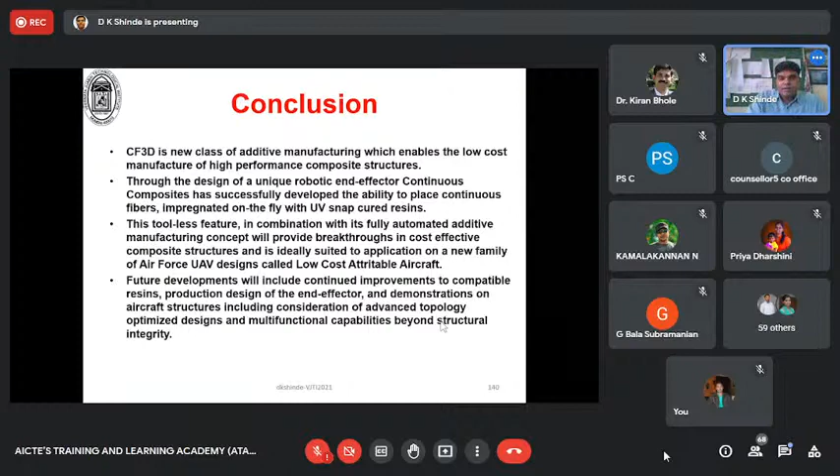Like India also doing the Udan scheme, they can also think about such kind of manufacturing of low size or low capacity aircraft. Future development will continuously involve what kind of resin, product, and effectors, how we can develop and optimize those parameters and processing, demonstrating functional capability in the structural integrity.

This is one area. Another one I want to discuss is large scale additive manufacturing of high strength fiber reinforced polymer composite. This is again from one of the papers from SAMPE. The experimental setup for large, bulky components - bulk structures - involves depositing using big area additive manufacturing, which we want to achieve for strength, done using 3D printing with multi-axis machines allowing printing three-dimensionally.

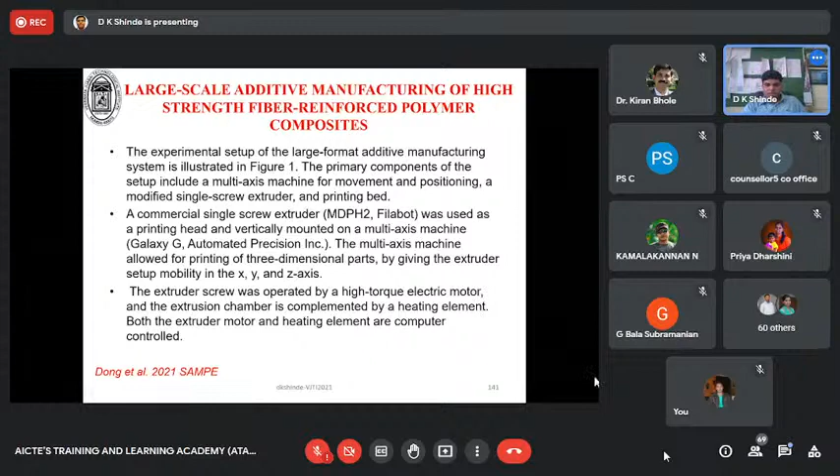The extruders have mobility in both X, Y, and Z axis, and then you have motors with extruder chambers and heating zones. So this is the experimental setup that people right now are trying to develop.

The standard nozzle is this much, so the nozzle can be modified. With the 5-axis controlled machines, you can have carbon fibers provided continuously through the bundles, and then the bed will be like this, and you can have your extruder controller using G-code programming method, CNC programming method, with the extruder head here.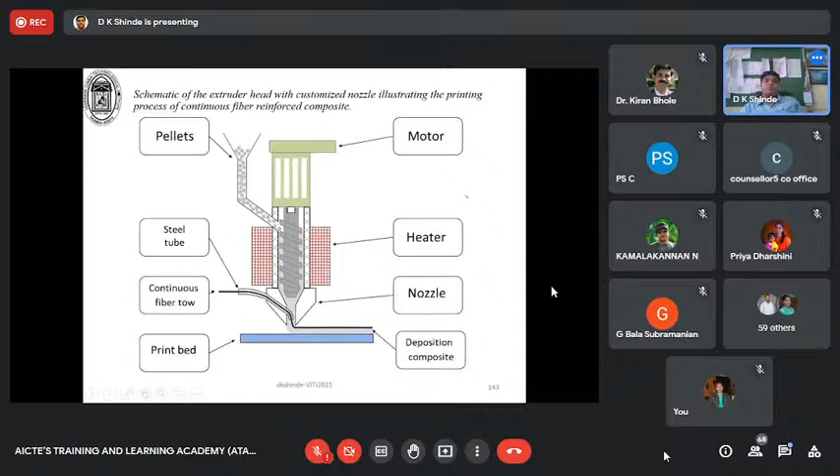So the input supply pellets as well as the continuous fiber through this particular tow will be coming, and heating of this polymer melted, and you can control this kind of 3D printing for large structures. So some of those structures which are built over here, this entire extruder will be moving on the large bed using automated robotic arms, automation.

So in large format additive manufacturing, this shape and size is possible, and you can develop the system enabling production of low cost, high strength, large formation of samples in a short time, because the curing is faster, selection of matrix and fibers in additive manufacturing filament can be deposited quickly, and your component will be ready. So time will be saved.

So this is particularly made up with PLA material, with continuous PLA as the matrix, and your carbon reinforced element. So the carbon fiber was impregnated, and then it was deposited. You can have chopped fiber, people have already developed that, but this is continuous.

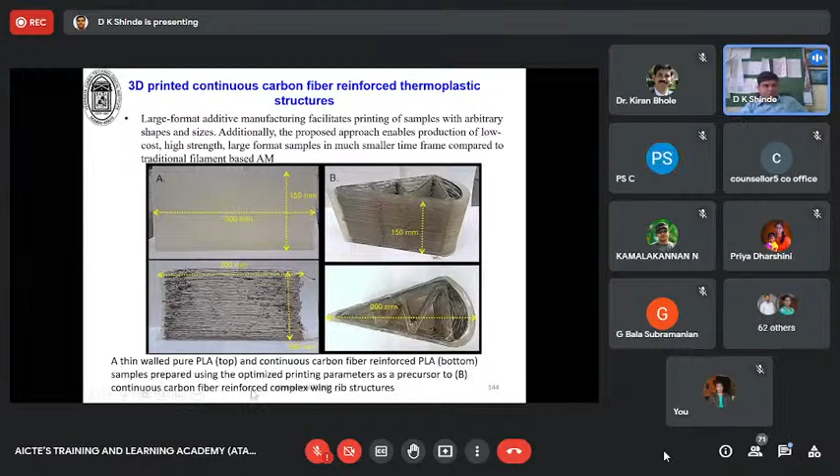So in this case, you have big curing ovens for thermoset resin, maybe autoclave methods. But if you have such an extruder, with these controlling elements, you can build such an element, or create a chamber, and inside the chamber the entire extruder will move as a robotic arm, and you can prepare such large 3D printed shapes and sizes of high strength, low cost material with rapid cooling methods, and throughput in a short duration of time.

So the conclusion from this large area additive manufacturing is the proposed manufacturing technique enables rapid and inexpensive fabrication of high performance complex structures using continuous fiber reinforcement. So fiber is coming and matrix is coming in a different way, you are melting, making impregnation and building, with an ability to rapidly print complex, large net shape structures.

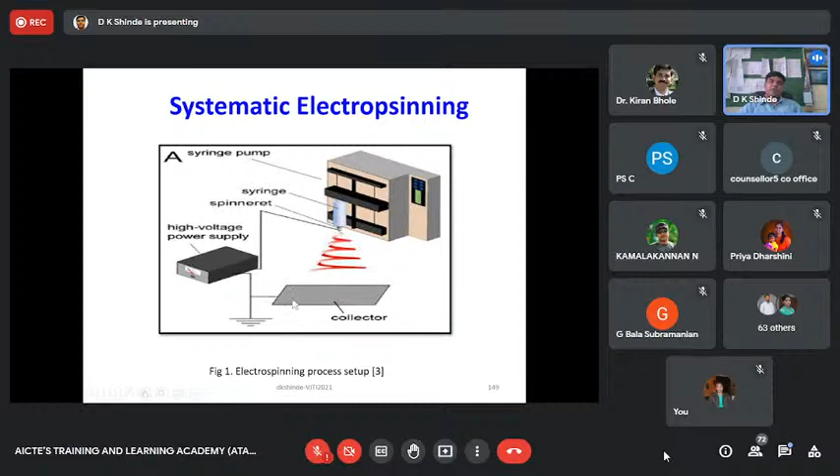In this case, what we have developed is our precursor with PAN and DMF solution, and then we mixed it at 60 degrees Celsius for 3 hours, and then cooled to room temperature. This is how we have the setup, and we do the regular preparation of the PAN solution, which goes through the spinning to produce such fibers.

So PAN powder is polyacrylonitrile powder with a molecular weight of 150,000, and you do the heating, and you can control the rotation of the magnetic stirrer, and this will be stirred properly. Once that solution is done, we can fill that solution in the syringe pump. The needle is there, one voltage applied here, another is here.

This is the electrospinning setup, an automated electrospinning setup available in our laboratory. We produce fiber using this. The voltage controller and syringe pump controller are here, and the temperature controller unit and blower are here.

Using these flat plate collectors, we can directly collect fiber due to the voltage difference and viscosity of the solution. A Taylor cone will be formed, and because of high surface tension, fibers are pulled out and collected on the collectors. These are the non-woven fibers.

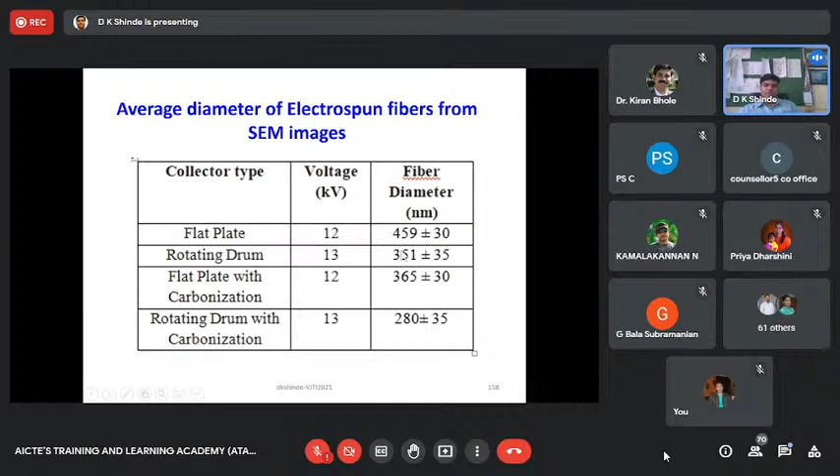We then did SEM imaging to see what these fibers look like morphologically. Fiber sizes were in the range of 459 for flat plate collector, 350 for rotating drums, 365 nanometers for flat plate after carbonization reducing diameter, and 280 nanometers for rotating collector - these are the achievements.

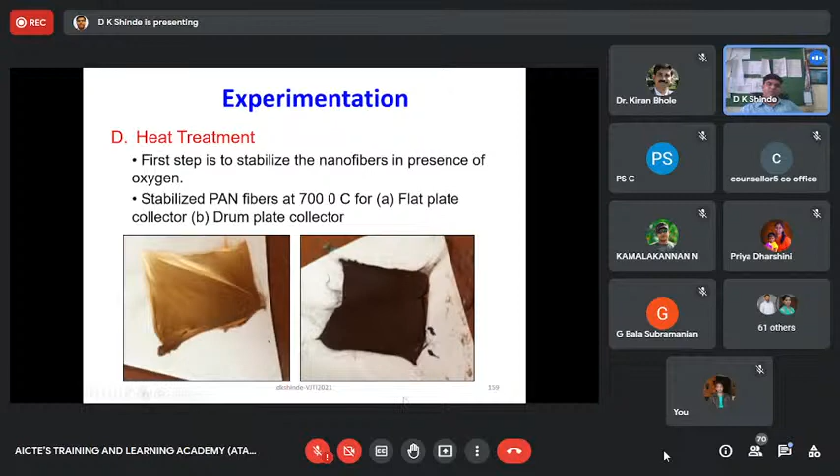Heating, stabilization, and carbonization are the processes after electrospinning. This is before, this is after stabilization, and this is after carbonization - the fiber shrinks, chains get arranged, and you get purely carbon fiber, 99% carbon.

After carbonization - so this is before carbonization, and after carbonization the fiber chains get attracted and the fiber shrinks. This is how the fiber looks after carbonization at 700 to 800 degrees Celsius. Then we did the electrical resistivity test to see whether the fibers possess higher conductivity.

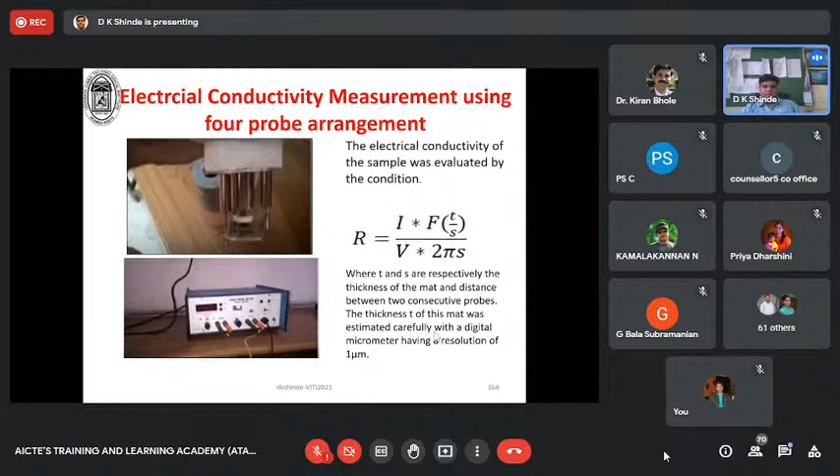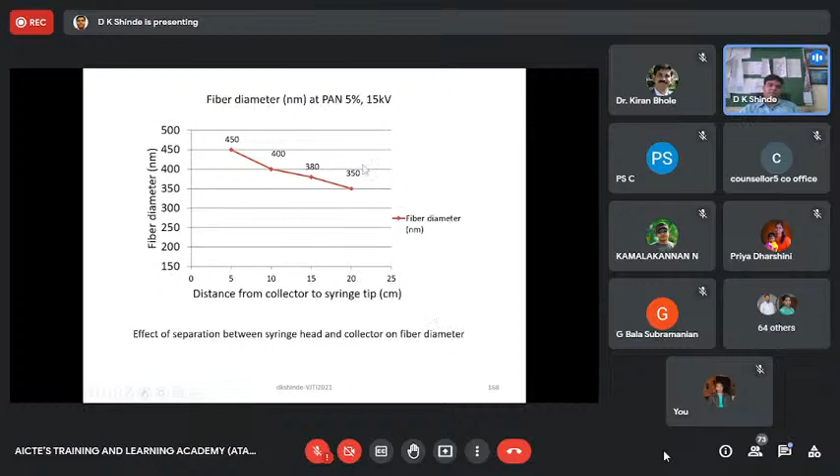As you keep decreasing the collector distance, fiber size will increase, so there is an optimal distance. What is shown here is 20 being the lowest, but we have maintained an optimal distance.

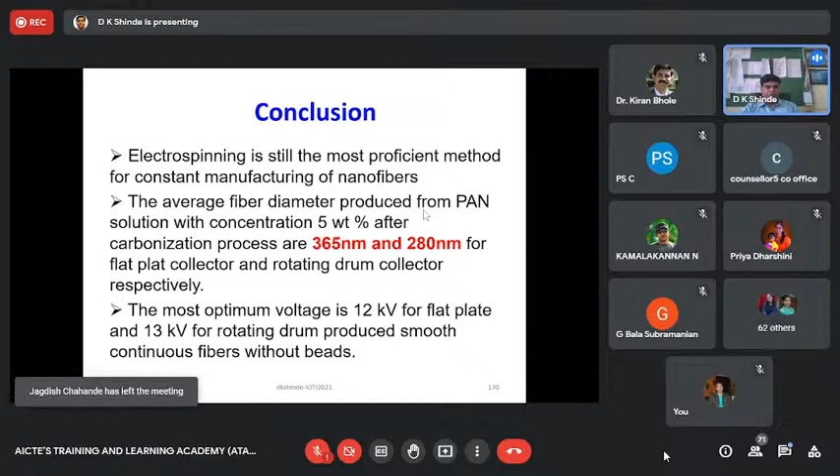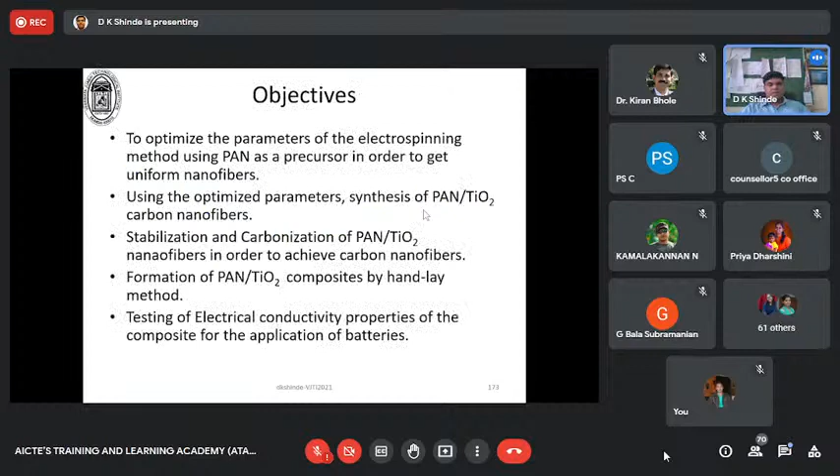So what we have done is synthesize with these fibers, again adding materials - nanoparticles. Titanium dioxide nanoparticles have been added, and we prepared some of these fibers using the same recipe, but with DMF, PAN-DMF with titanium dioxide added.

We did electrospinning to see what fiber we get, then stabilization and carbonization, and examined the morphological and electrical properties under analysis. We mixed nanoparticles of titanium dioxide in the DMF solution setup, using a 0.58 percentage for titanium dioxide particles in the solution.

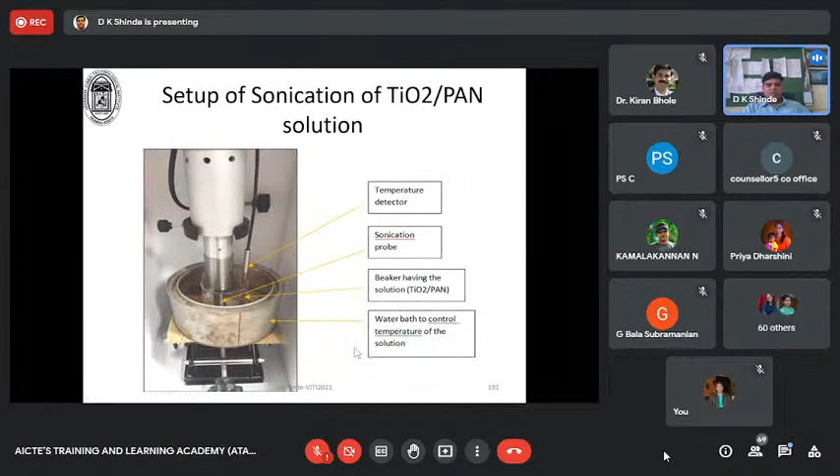This is a recipe, and then we mix it and sonicate using the sonicator to disperse the titanium dioxide particles in the DMF PAN DMF solution, so as to obtain uniform distribution or dispersion of the nanoparticles in the fibers. This is how the solution looks after the sonication.

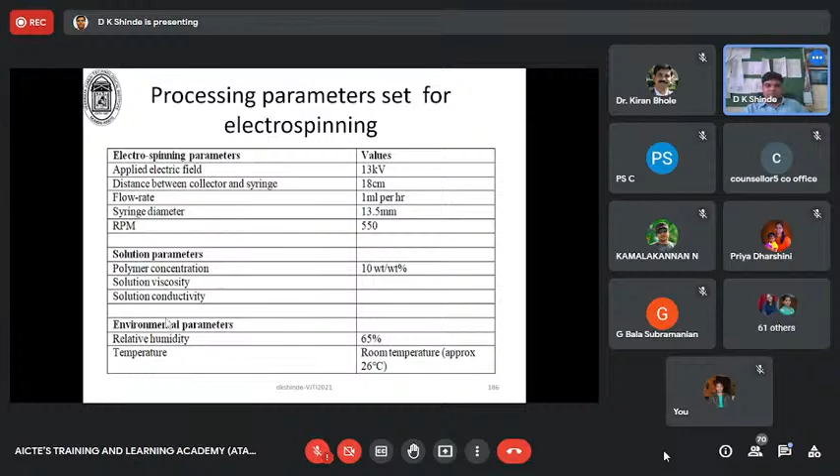These are the processing parameters which are set for the PAN with titanium dioxide to obtain good quality fibers, and those fibers were taken for stabilization at 280 degrees Celsius, and then after stabilization taken to carbonization in the CVD chamber at 700 degrees Celsius.

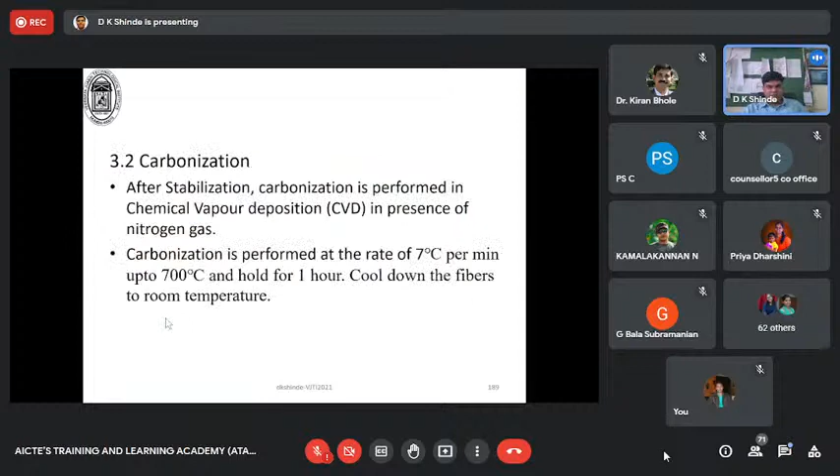So this is what we have done, and those fibers we will now be using as carbon fiber to produce 3D printed material using PLA as well as ABS.

We have other things, but I think due to the time limit, I will stop here, and I will take queries from the participants.